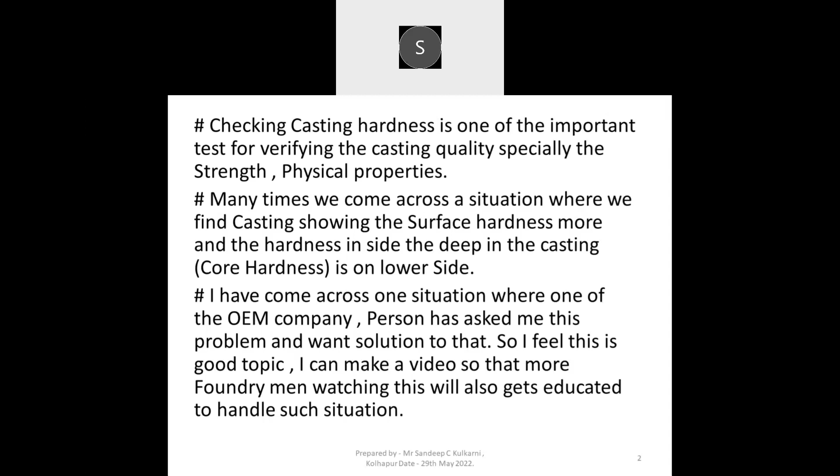So I feel this is a good topic, and let us make a small video so that more foundrymen watching this video will also get educated to handle the situation. So, considering that situation, I am making this small video.

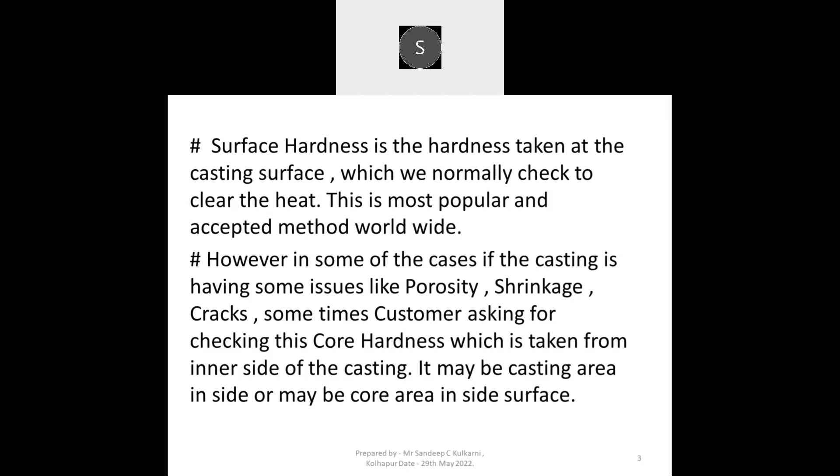Surface hardness is the hardness taken on the casting surface, which is normally checked to clear the heat. This is the most popular and accepted method worldwide. However, in some cases, if the casting has issues like porosity, shrinkage tendency, open grain structure, cracks, or sometimes the customer asks for checking core hardness, that is the hardness inside the casting, which is taken from the inner side of the casting. It may be the casting area inside or the core area in the casting.

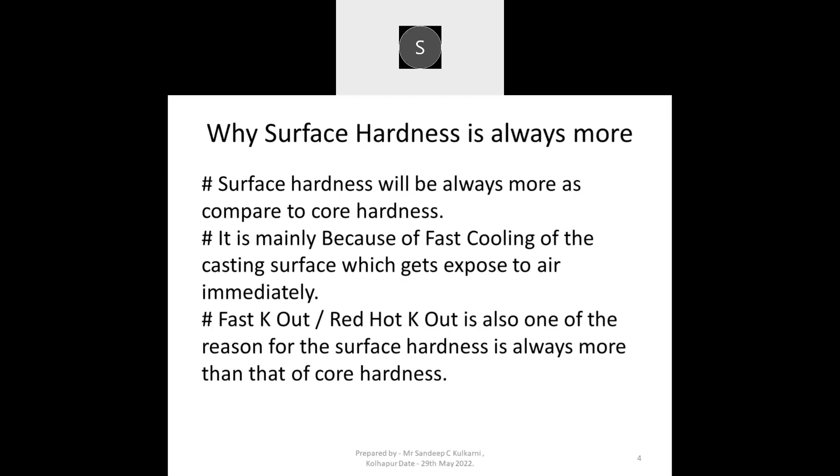Why is surface hardness always more? Let us understand now. Surface hardness will always be more as compared to core hardness. It is mainly because of fast cooling of the casting surface, which gets exposed to the air immediately after the box is knocked out. Fast knockout or red hot knockout is also one of the major reasons the surface hardness is always more than the core hardness.

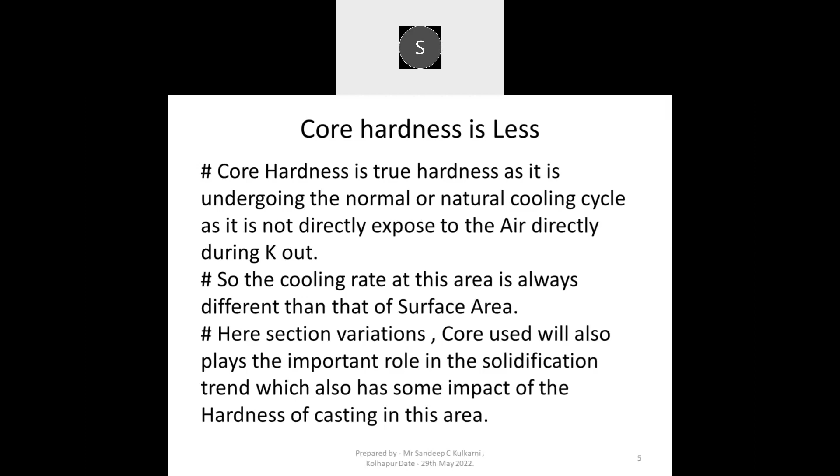Core hardness is less. Core hardness is a true hardness as it undergoes the normal or natural cooling cycle, as it is not directly exposed to the air during or after knockout. So the cooling rate in this area is always different than that of the casting surface area. Here, section variations and cores used also play an important role in the solidification trend, which also has some impact on the hardness of the casting in the core area. But even after that, the hardness in the core area will always be less than the surface hardness. Some guidelines to handle this situation.

Many times we need core hardness to be improved. It may not be the same or equal as surface hardness, because we have already seen that surface hardness will always be greater than the core hardness. But by using a better charge mix, change in chemistry, improving the solidification trend, and controlling the cooling cycle, you can reduce the gap between these two. So we have to work on the charge mix, chemistry, solidification trend, and cooling rate as well.

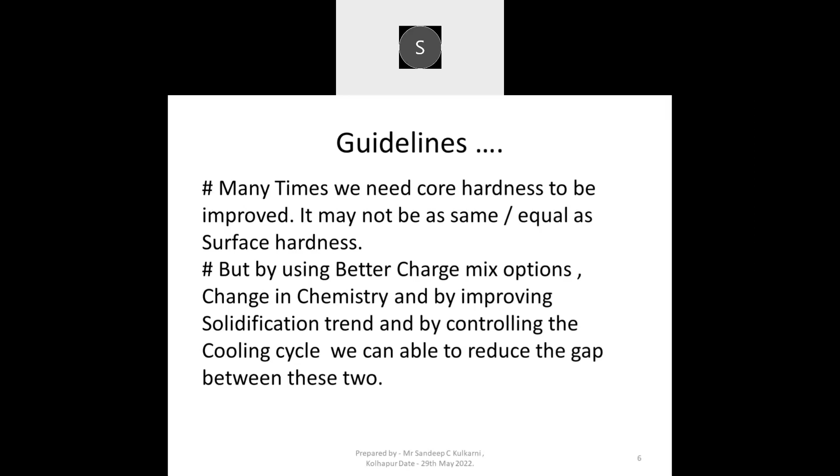Many times we find situations where the surface hardness is okay within limits, say 197 BHN, but there are other issues like shrinkage, porosity, or microporosity observed in the core hardness area. Here the core hardness is too low, about 162. So your surface hardness is 197 BHN, and there are issues like shrinkage, porosity or open grain structure. When you cut the casting and check the core hardness, it is around 162. So there is a gap of almost 35 BHN between the core hardness and the surface hardness.

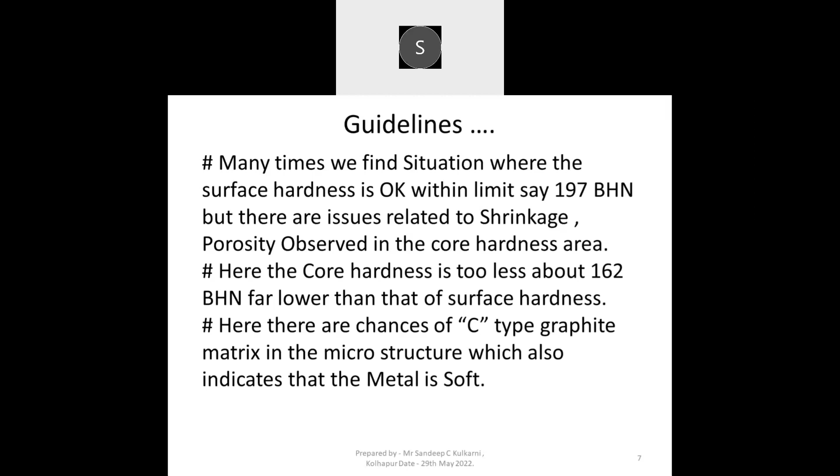Here, there are chances of C-type graphite in the microstructure matrix as well, which indicates that the metal is soft in nature. Because 162 BHN is the hardness at the core, we can find C-type graphite in the microstructure. It indicates that the metal is soft. This data is from the OEM representative who had the problem, so it is a true case study. A gap of around 35 BHN is there, and they have observed C-type graphite as well as open grain structure, some shrinkage and microporosity in the casting while machining.

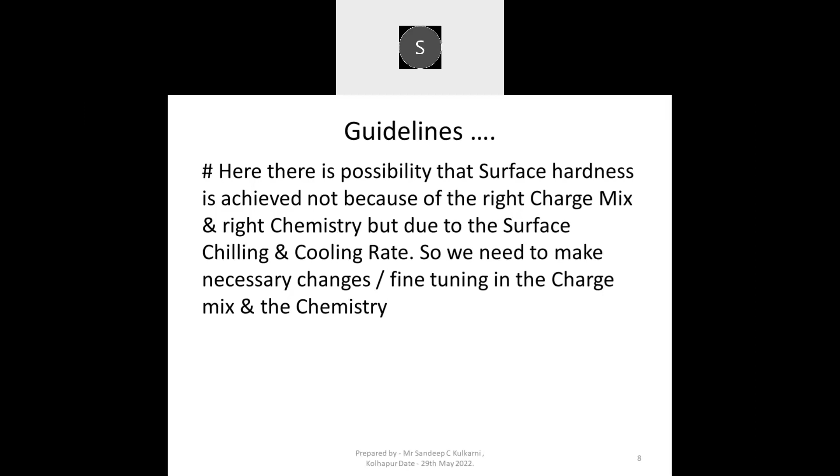Here, there is a possibility that surface hardness is achieved not because of the right charge mix and right chemistry, but due to surface chilling and cooling rate. So we need to make necessary fine tuning in the charge mix and chemistry, by adding some more percentage of MS, adding some more alloys, and reducing carbon and silicon as necessary. By this, we can improve the core hardness from 162 to 187 to 197 BHN, and by controlling cooling time or cooling rate, we can maintain the surface hardness at 207 to 217 BHN. Thus, the difference between surface and core hardness reduces from 35 BHN to 15 to 20 BHN.

So, by adding MS, controlling the alloys and the cooling rate, we can reduce the gap between core hardness and surface hardness, maintaining proper chemistry and proper charge mix. We can get good surface hardness as well as good core hardness, which will reduce issues like porosity, shrinkage or open grain structure.

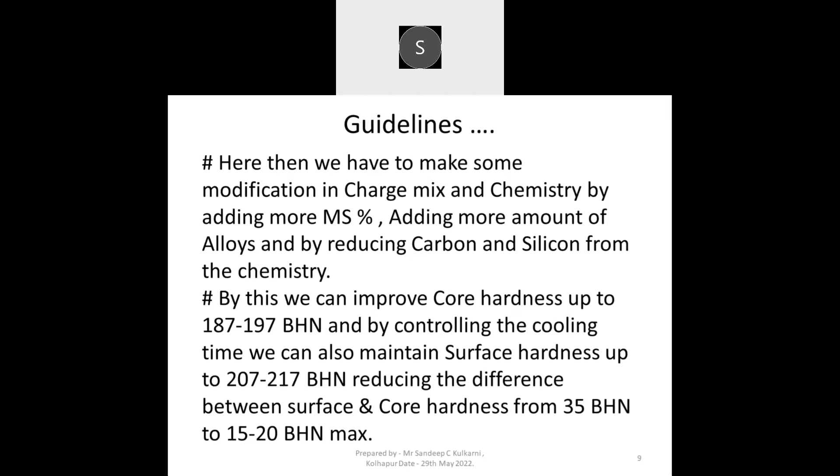So this is from our side. Thank you very much. Hope you understand the concept of core hardness and surface hardness, and also how to reduce the gap between these two.